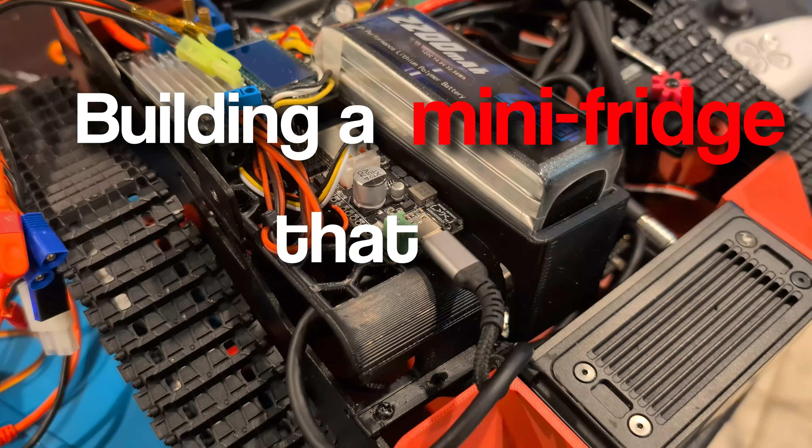Dude, get this text out of the way, man. Okay, so here's the plan. If I want my mini fridge to run away from me, there's a number of things that I'm gonna have to program and build for it to do exactly that. All right, let's set some goals.

First off, it's got to move under its own power. And then second, it has to see. It has to know where I am and where the world is. Okay, and then third, it needs to decide. It should choose to chase me or run away from me. And then fourth, it needs to not die, so it needs to go around stuff instead of into stuff.

And 5, it needs to serve. If I catch it, it needs to open its door and give me a drink. Hey, let's do this. 30-second build montage.

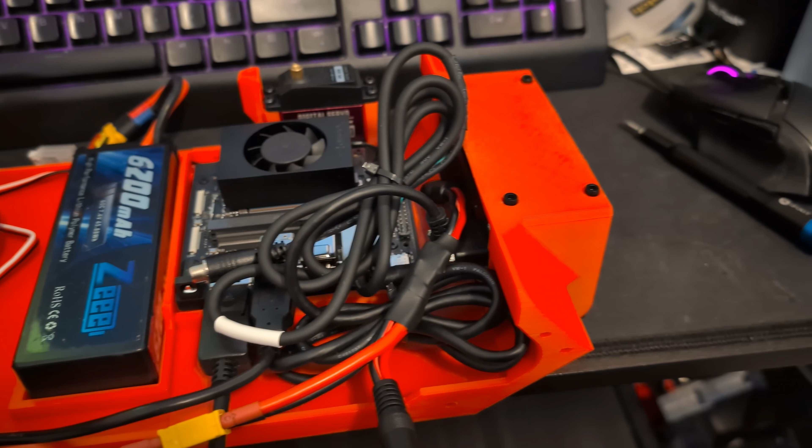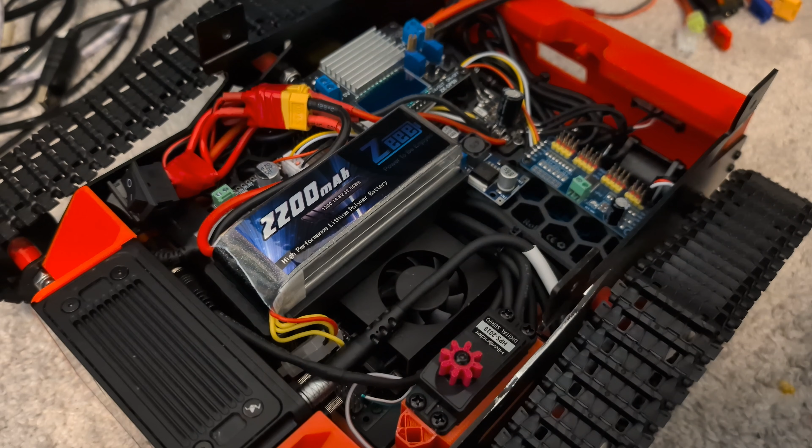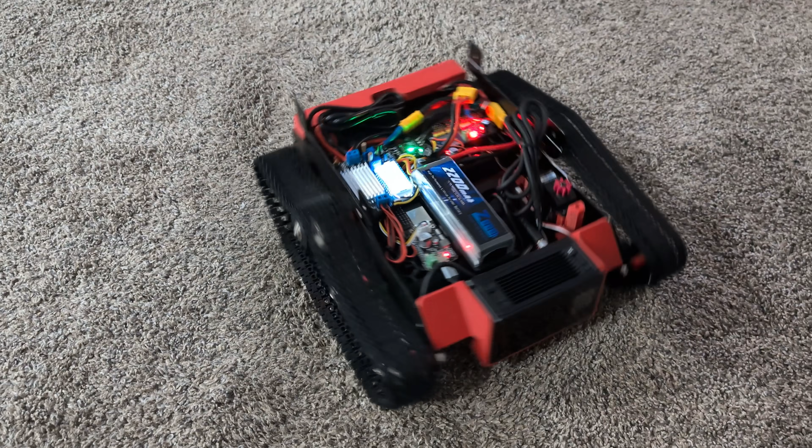All right, that was a little much, so let's start breaking this thing down. It's essentially a little bit like an RC car, but with a lot more components. So how did I even come up with this?

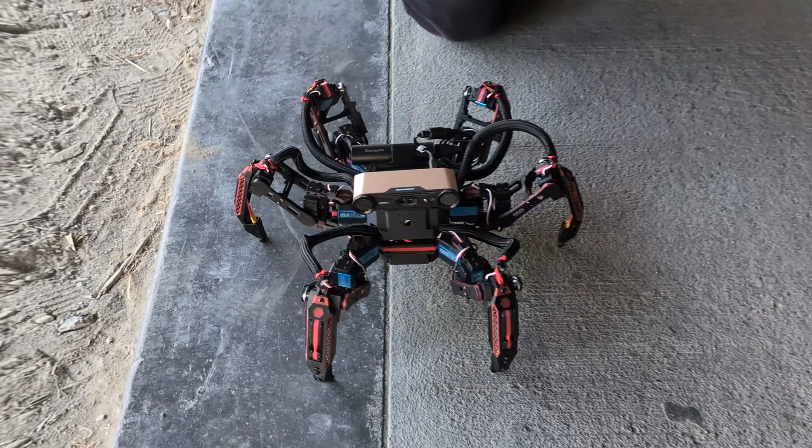Originally, this robot wasn't even gonna be a tank. The first idea was to put legs on the fridge. If you remember my hexapod chasing video, I was basically gonna put that hexapod base underneath the mini fridge, but not only did it not really fit, it also didn't really make sense. Honestly, I thought about it for more than 4 seconds, and a walking fridge that shakes every single drink inside of it sounds more like making a bunch of soda grenades, so I went with a tank base.

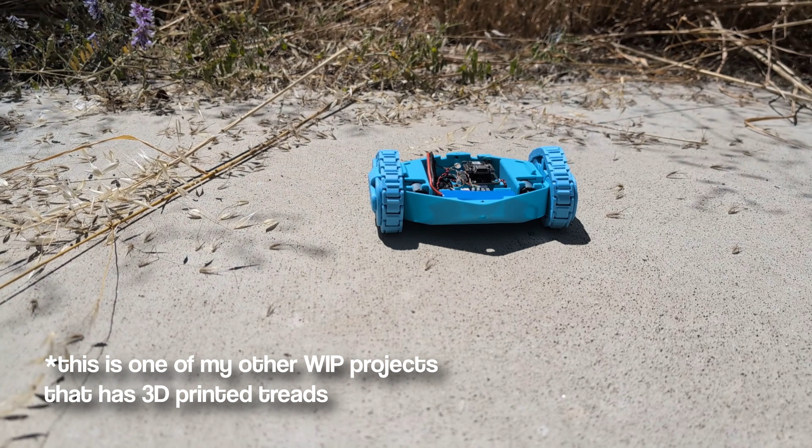Tanks look cool and tanks work. Decision made. Now, my first version of the treads, I tried to design for 3D printing, like all of it. I wanted it 100% 3D printed, which is a cool idea until you remember I kind of want this tank to go fast, and printed plastic treads at speed just turned into a very expensive bag of loose parts.

So I did the responsible engineering thing and just bought real ones. In the modern age of capitalism, you can basically buy anything from Amazon, so there was an option readily available for tank treads for a robot of this exact scale. The treads and the supporting wheels bolt onto a metal sheet, and I needed to print a whole body around it so that it perfectly matched the bottom of the fridge.

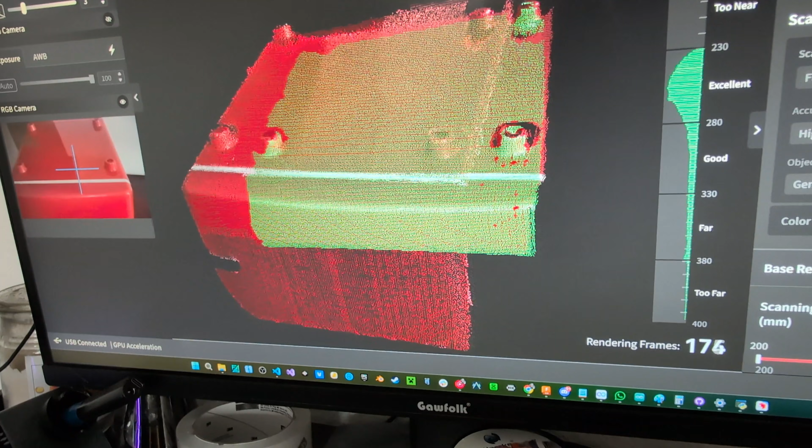And that shape was weirdly organic, and there wasn't any easy way to measure it, so I cheated. Well, correctly. I 3D scanned both the metal sheet itself and the bottom of the fridge, and I pulled both scans into Fusion 360 as a reference, and from there I could design the inner core of the tank so that the spacing matched and the treads mated into the fridge without guessing a single dimension.

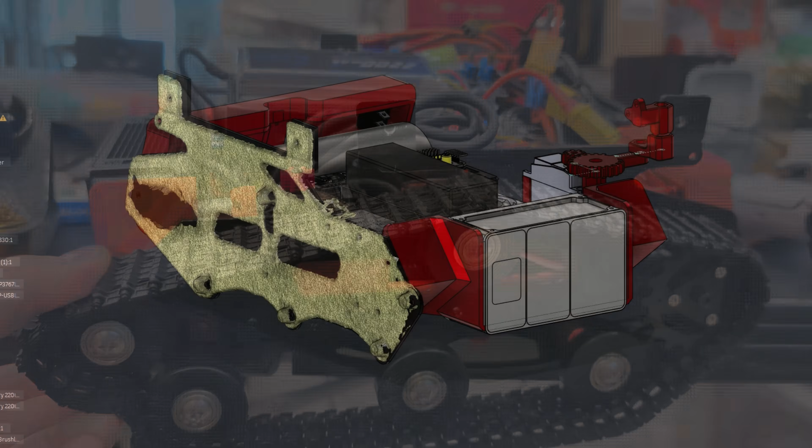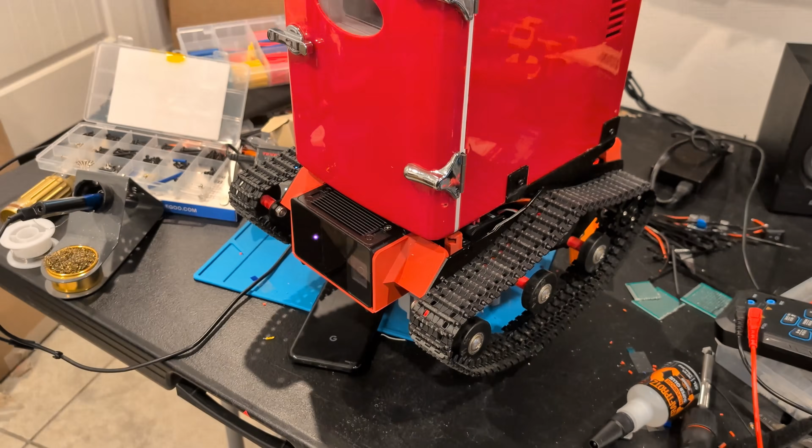Then I mounted the first version of these treads and kind of tested it, which just meant rotating it by hand, but everything worked. Anyway, the drive motors that actually run the treads themselves are Repeat Robotics Ultra Mark II brushless gear motors. I know that's a mouthful, but these motors are ridiculous. They are 12-pound combat robot motors on a fridge. I did one full power test with no treads attached and immediately decided I would never do that again without some kind of safety shield.

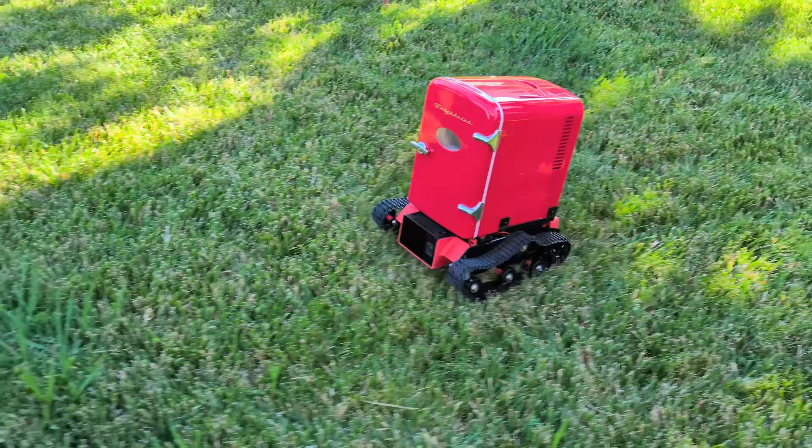So I had to write in a bunch of limits in the software for the max speed, minimum speed, and that kind of thing, because a fridge that does a wheelie isn't really a feature, it's more like a disaster. And yeah, later on we're going to talk about how much I had to limit it because the number is genuinely funny.

So now I had the shell of a robot that could drive around, but there was one thing missing, a door that opens itself. Objective 5 was to serve a drink, which means the fridge has to open its own door. So I built this little linkage off to the side of the door driven by a 25 kilogram servo, and for this mechanism to actually work, I had to rip out the latch from the door and replace it with magnets so that it could be pulled open using the servo. This whole thing was actually pretty tricky to get right, but eventually I had it working.

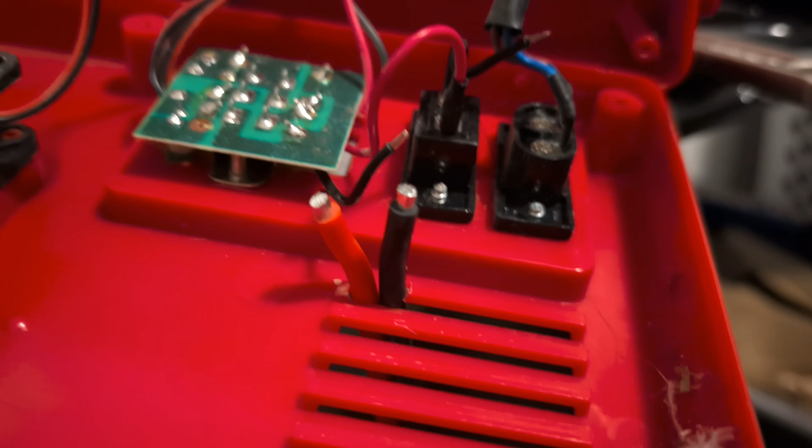I also rewired the internals of the fridge to run on 12 volts. I usually keep it off because it consumes a lot of power, but when I want to deliver something cold, I can definitely do that.

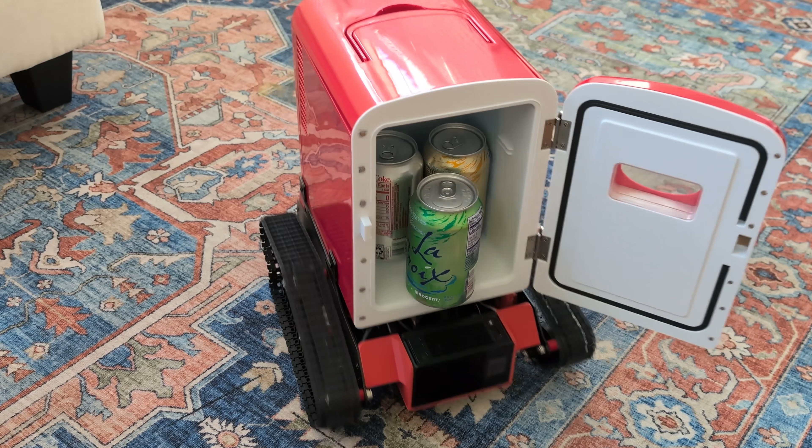Alright, so now we basically have all the pieces. We have the printed core, the scary tank treads, and the motor-driven door, all of which definitely works as intended. That's one big step done. We have a fridge that can move, but now we have to give it autonomy, which is probably a big mistake. I don't have a great track record with giving my robots autonomy and them not wanting to kill me.

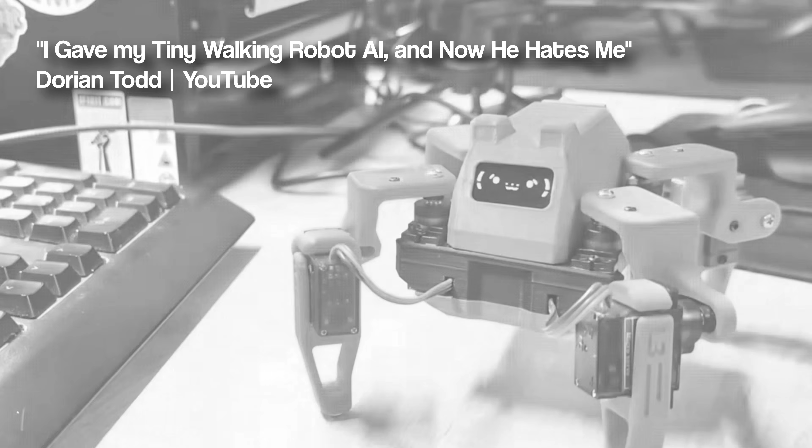Fun? You dare to call this fun? I'm gonna do it anyway, but how do I actually get it to run away from me?

For the fridge to run away from me, it needs to know its spatial positioning in real time.

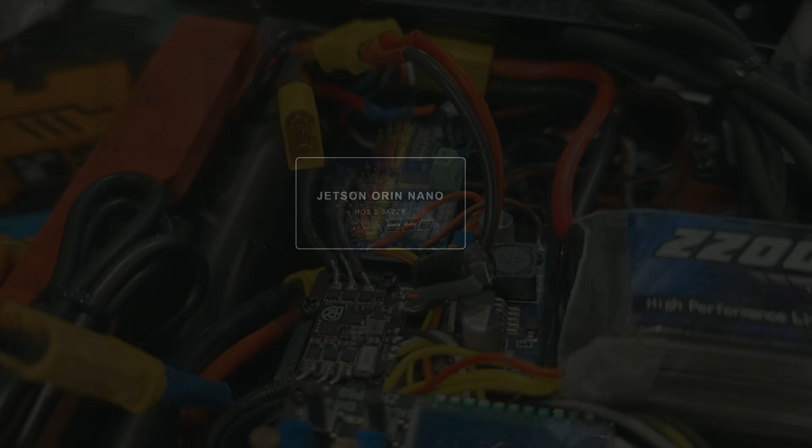It honestly took longer than I'd like to admit to learn ROS, but I was doing it from scratch through YouTube tutorials, which are mostly outdated. Regardless, I was able to build out some interesting systems. Very similar to some of my other projects, I built out this kind of net of electronics that all communicates together and runs crucial software.

For example, the NVIDIA Jetson is running a nano version of the YOLO vision model for person tracking, and I export the model to TensorRT so that it's running on the GPU and not the CPU. And that GPU part is not a flex, it's a strategy, because I need the CPU for navigation later. So vision lives on the GPU and driving lives on the CPU, and the two never fight each other over the same dinner.

Alright, so there's a lot of infrastructure here, but we need to talk to the motors, and as I described before, the spinal cord, or the ESP32, is the part that talks with the motor ESC and can actually send motor commands. The Jetson talks to the ESP over serial using a 4-byte message: a sync byte, a left speed, right speed, and a door command. 100 means stop and 0 is full reverse, 200 is full forward. It automatically resyncs itself if a byte is ever dropped, so a little bit of noise won't make the fridge jump or lurch around.

Now for the door servo - originally I ran the servo straight off of the ESP32 and it fought me. It turns out the ESP32's servo library only has so many internal timers. I knew this from all of my previous encounters with this internal timer issue, but I just bit the bullet and added a PCA servo driver into the system.

Okay, so next up is decision making. I've basically set it up so it can be manual, auto, or semi-auto. Semi-auto is really unique because in theory it's like assisted teleoperation, kind of like a backseat driver that's actually helping. It uses the front camera to chase me and the rear camera to run away from me. It's basically the same system but inverted for the front and back.

Alright, we're finally on to objective 4: not dying, and this is where it gets real. I brought in Nav2, the standard ROS navigation stack, and it takes the point cloud from the Odin and builds a live map of what's immediately happening around the robot. It plans a path that goes around obstacles, and then there's a translator positional node that I had to write because Nav2 doesn't actually know how to follow people.

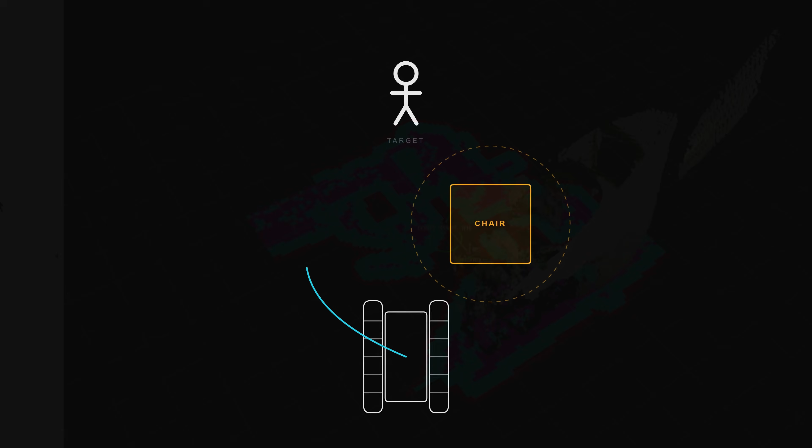So in follow mode, it sets a goal about a meter short of where I am. And in flee mode, it sets the goal in the opposite direction, updating as I move, so it's constantly plotting an escape route from the moving threat, which is me.

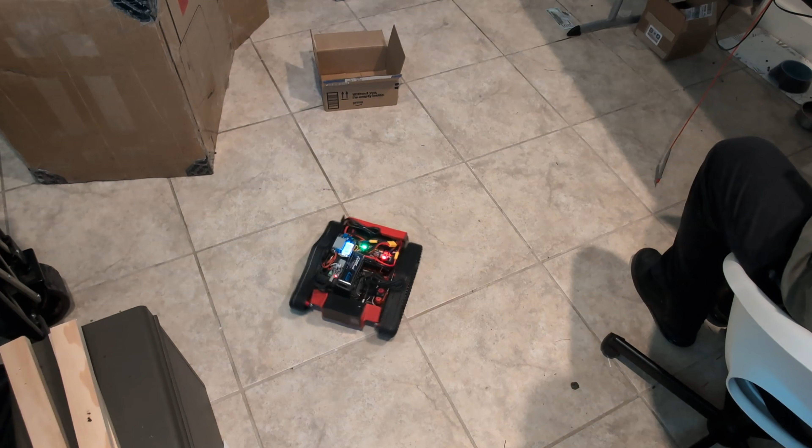I'm the threat. One other nice touch is that I made a velocity smoother node which sits in between the controller and the planner and basically smooths out the aggressive motors, meaning the fridge won't launch forward with everything inside of it, but this only applies to semi-auto and auto. In manual mode, I get the raw unfiltered experience so I can drive it around as much as I want.

Yo, it did a wheelie.

Alright, now we're finally on the last piece: control. I didn't want a laptop tethered to it, that seemed a little jank, so the NVIDIA Jetson serves a web page. I pull it up on my Steam Deck, and the deck's own joysticks and buttons drive the robot through the browser. This page shows live telemetry and the robot's camera view. So here's the final setup: I'm chasing my refrigerator across a yard, holding a handheld gaming PC, watching what the refrigerator sees, with a giant red stop button under my thumb, just in case anything decides today is the day.

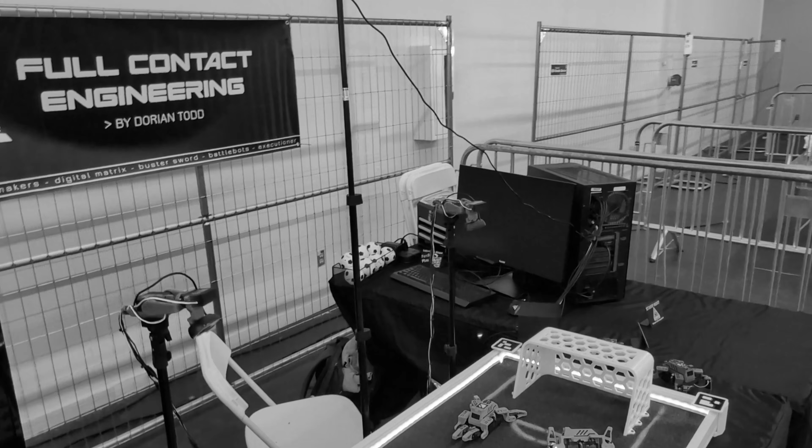Anyway, I was making great progress on the project, and then a random side quest popped up. We are here at OpenSauce 2026 — I did a giant booth at OpenSauce 2026, and I'll have a big video on that later. What's more important is that I made a small customization to the tank while I was here. Honestly, I think it's missing something.

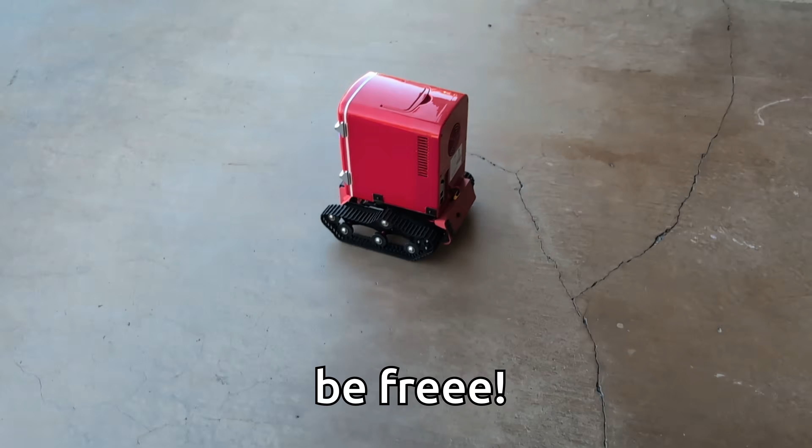Let's go drive this thing around. Be free! Yo, I drove this guy around the whole event, and it was really funny.

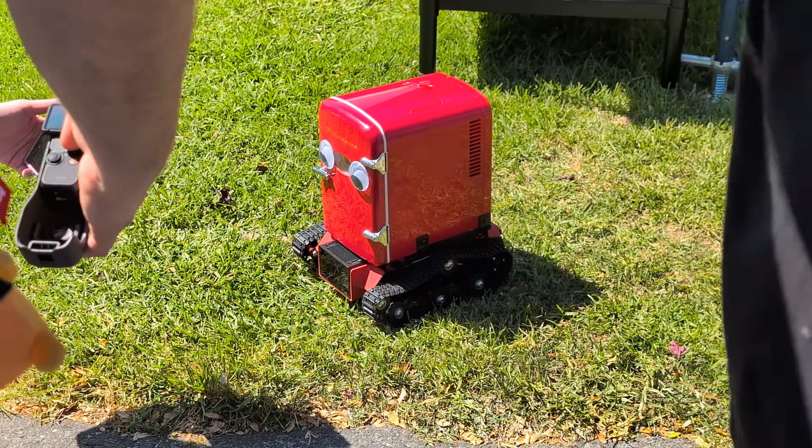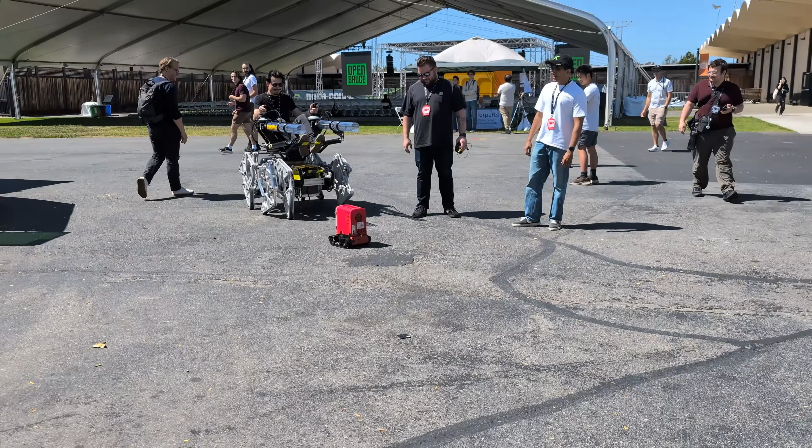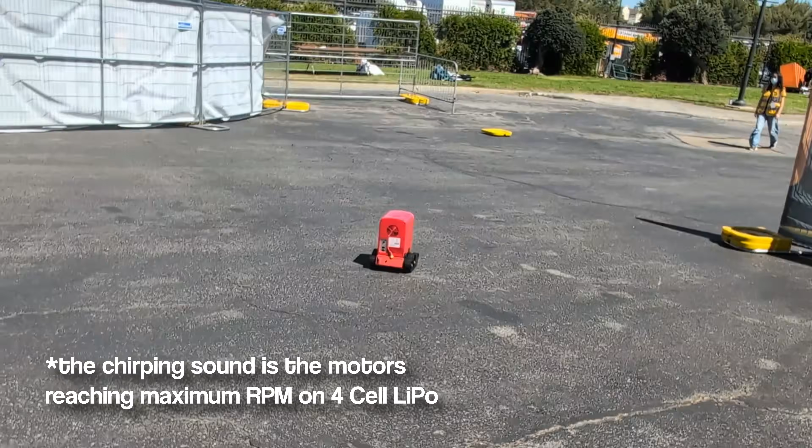That was insane. I swear, nowhere else, at no other event, can you drop your Sesame robot out of a fridge and show it to Michael Reeves. OpenSauce was incredible.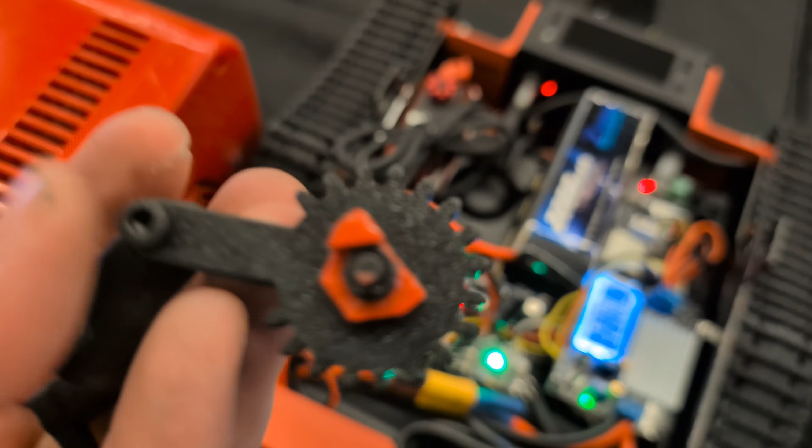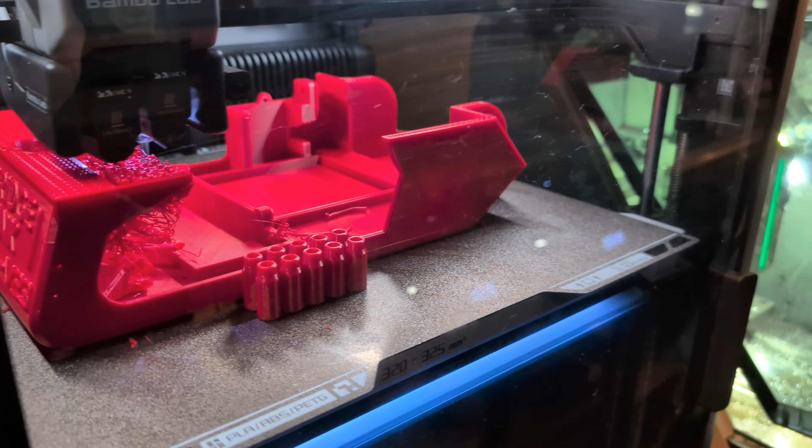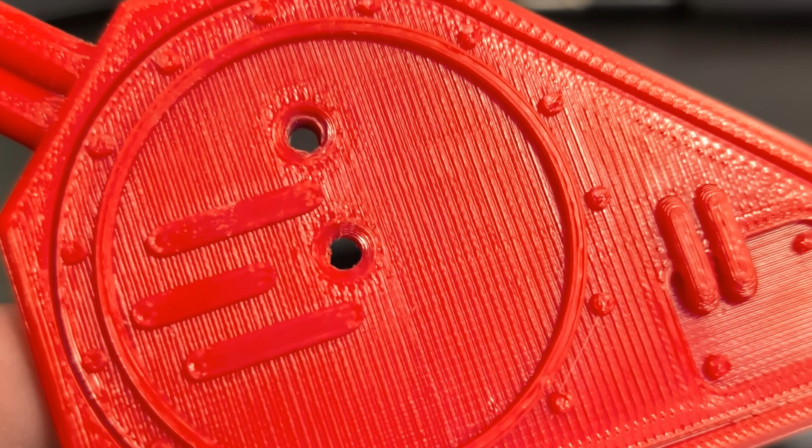At around this point I had gotten back from the event, and the robot had sustained some major damage. As much as I wanted to completely ignore it and go right on to testing, I figured I might as well take the opportunity to redesign some parts and print them a little stronger. So I got a little ambitious and printed the entire thing in ABS, figured out how to do vapor smoothing, and vapor smoothed the exterior of the robot. Then I reassembled everything, added a bunch more features, some motors, 10 other project guards with designs on them, a brake light — you get the idea. I basically rebuilt the entire robot, but I'm so glad I did, because it looks better than ever.

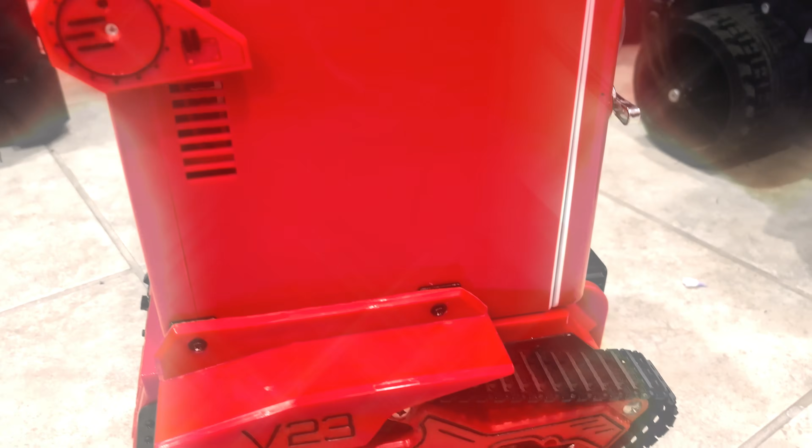Alright, now I thought it was ready to run away from me, but then I brought it out and it just wasn't working. I took notes, assessed what needed to change, and put my head down and kept working. With projects like this, even if you hit a setback and it feels like nothing's going to work or you're going to miss your deadlines, it's important to just assess the situation, set goals, and keep going.

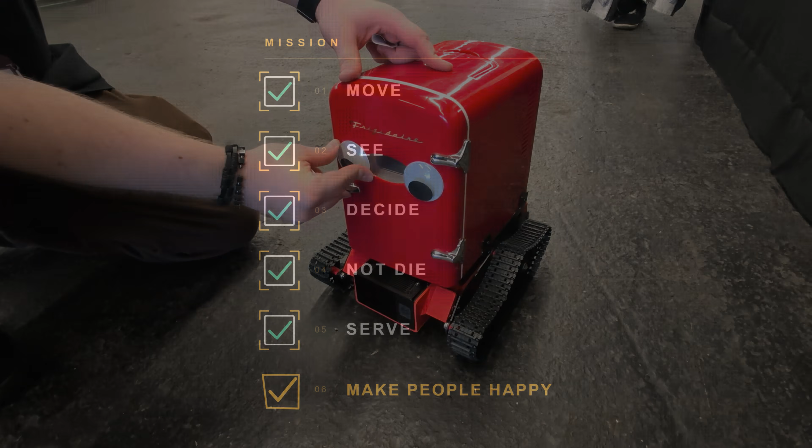So let's recap — how did we do on our 5 goals? Well, we hit 5 for 5. I built a mini fridge that can see me, decide how it feels about that, drive itself around obstacles, run away from me across a yard, and reward me with a beverage when my cardio pays off. And we achieved the 6th secret goal: making thousands of people at my favorite convention genuinely happy. That one wasn't on the list, but it turned out to matter the most, and it cost $2 in googly eyes.

So what's next? Well, this thing isn't done — it's filmable, which is different. Here's where it's going. One of the biggest things I've wanted to implement is Smart Summon using ultra wideband. Right now, everything is line of sight — the second I hide fully behind something, the cameras lose me. The fix is UWB, basically radio time of flight. I wear a little tag and the fridge gets my range and direction even through furniture, walls, and my own body, which means Smart Summon: I press a button and the fridge navigates through its environment to wherever I am in the house. A refrigerator that comes when called — it's a little bit like a cold rectangular dog.

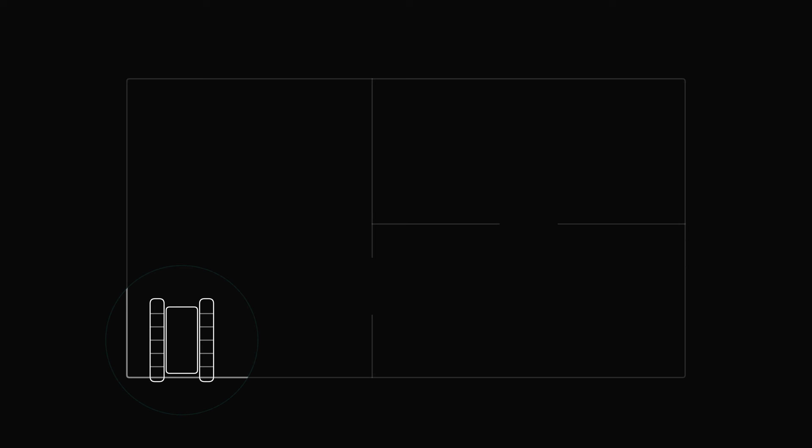The other feature I want to add is persistent target ID. Right now it locks onto the closest person every frame, so in a crowd it'd cheerfully switch between people to whoever steps in front. OpenSauce proved this instantly, and I never actually turned on the autonomous mode because I knew it would be a little chaotic. The third feature I'd love to add is a global map. Right now it only knows its immediate surroundings, but letting it build a global map, like one of those smart Roombas, would allow you to set destinations, such as charging points, or perhaps meeting someone at a couch.

And there's so many— wait, hang on, I think I'm getting a call. I'm gonna get on this. Yo, what's up? Is your refrigerator running? Yeah, of course it's running. What? No way. Yeah, and you should run too. No.